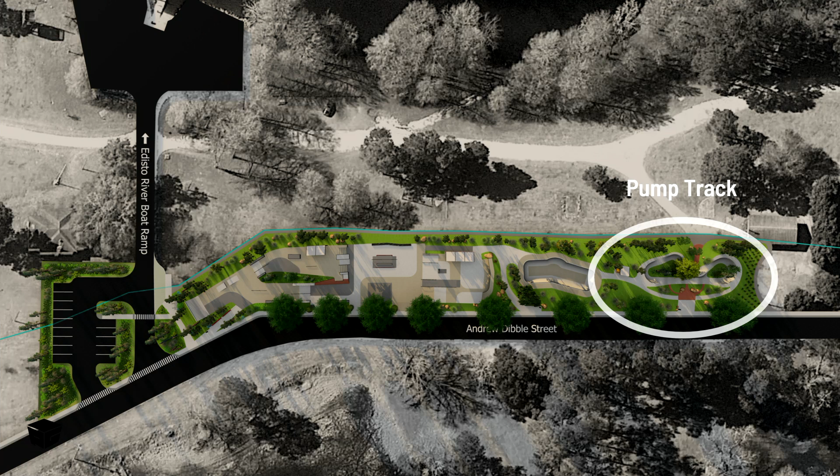One of the things we took aside for inspiration was obviously the Edisto gardens just on the other side of the road, and all the beautiful landscaping that you guys have. So we took that inspiration into the park.

We feel a lot of parks and municipalities stop at the boundary of the skatable areas. So if you call it a court, you're done right there, and then there's nothing. We feel like that's an injustice. We all have friends, we all want to hang out, we want to take a break outside the park and not step on dirt, right? So we went outside of those lines and really created good line of sight and circulation.

We're probably going to tone down some of the landscaping you're going to see, to not compete with the memorial pine trees on one side and also some of the already existing vegetation that's there. And also just to have money to build a skate park, right? So just wanted to let you know you're going to see a lot of art and stuff, but going forward, I want to encourage you guys, any creative ideas, hold onto them, and on the Q&A let us know.

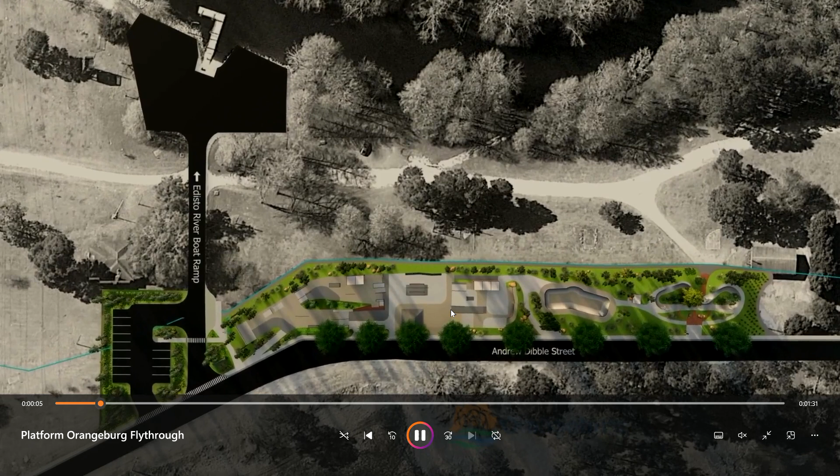So we put this together just to give you a sense of it - it's always hard to discern from a 2D drawing, so the video gives you a nice fly through.

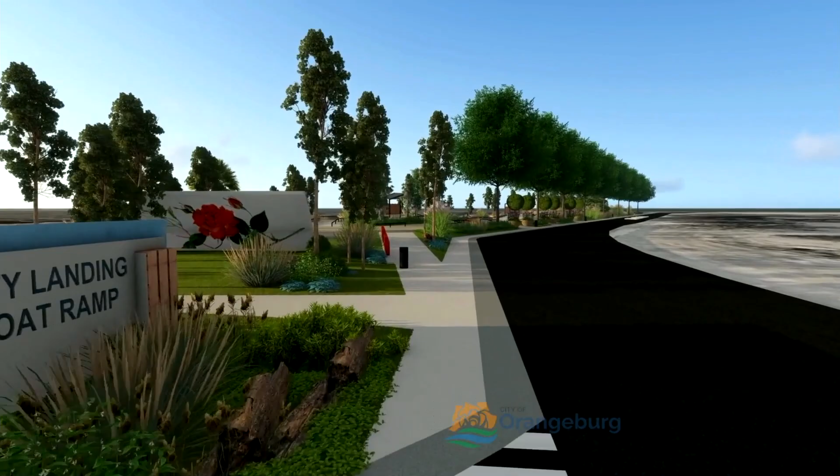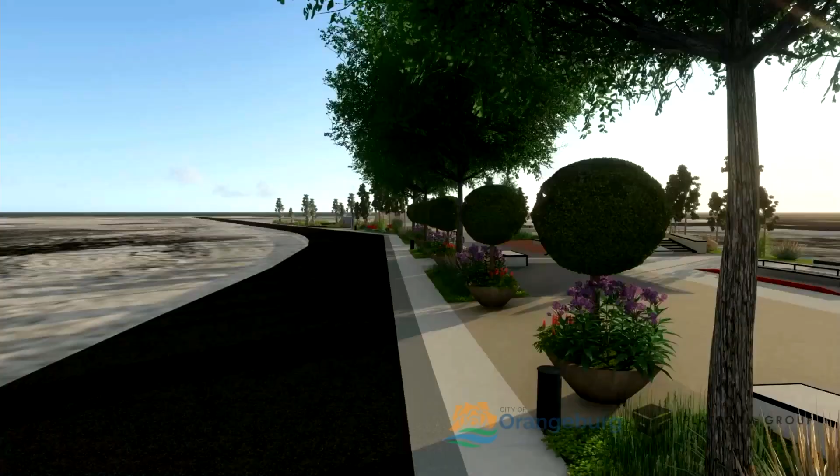Again, to talk to the point made - this is in the city of Orangeburg, so we want to provide things that speak back to that. So not just the skate park signage, but the mural on the back of the bank towards the south end of the park. If you have any other thoughts, those could be good suggestions for the survey - like a sculpture here, things that help you think back to the city of Orangeburg.

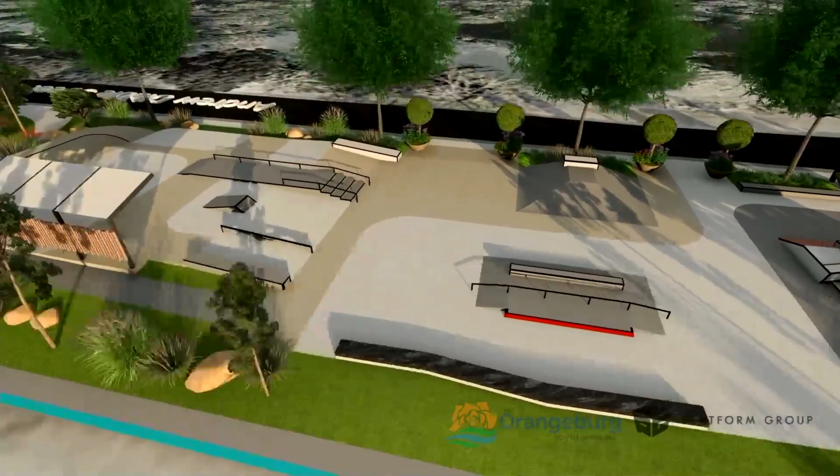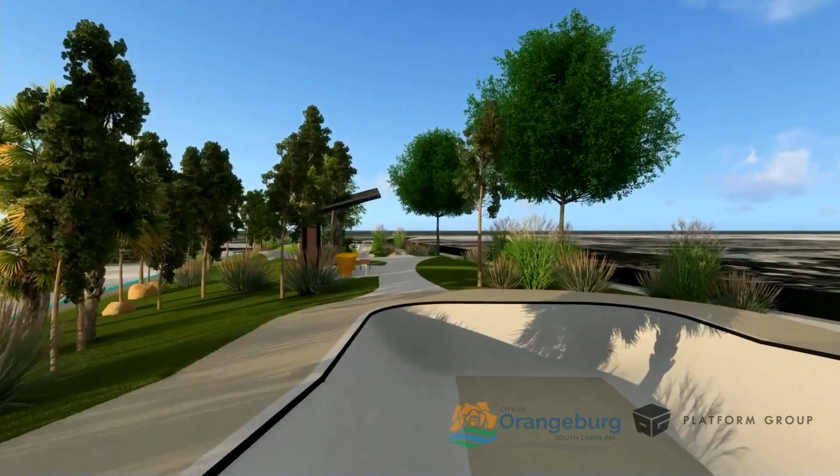A lot of the landscape shown is just to help give a sense of space, but we definitely don't want to compete with some of the existing vegetation out there, especially the trees he was talking about. On the east side of the roadway, they're freedom trees - there's a sign there that talks about it, and they were installed in 1974, 49 years ago.

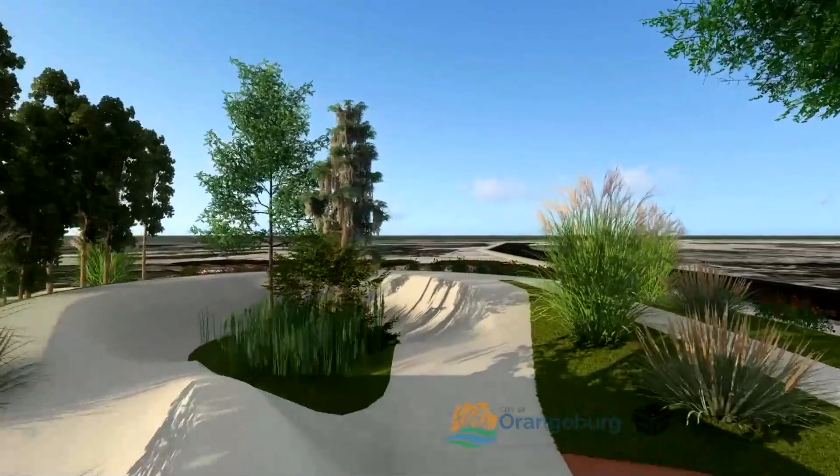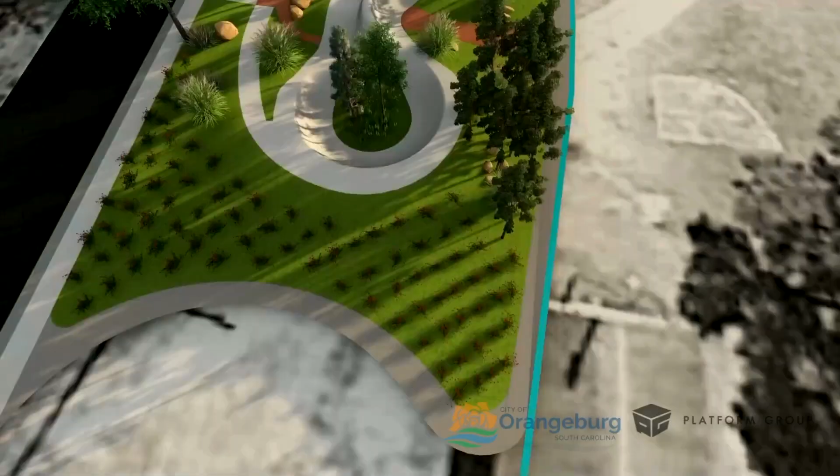Here's the pump track on one side, and you can see the linear aspects of it. We're probably going to talk about toning the elevations on the pump track down a little bit, but this park is just screaming special and unique. So we really want to hear your opinion and hope you like it, so we can build upon this design into the construction.

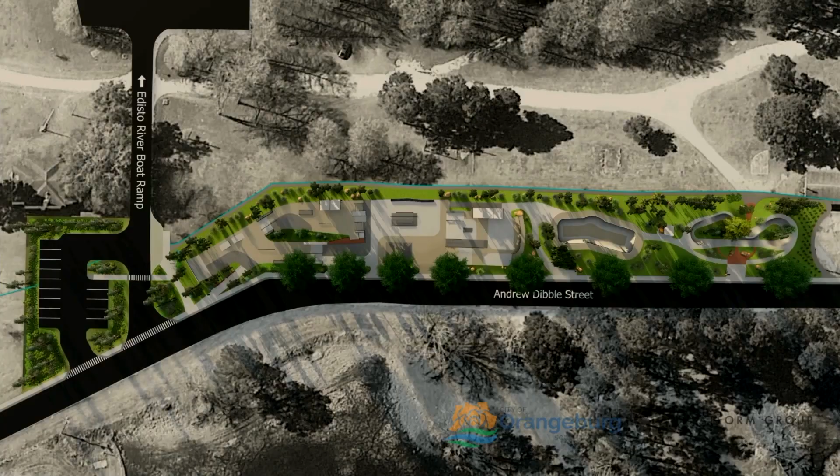That should be the end.

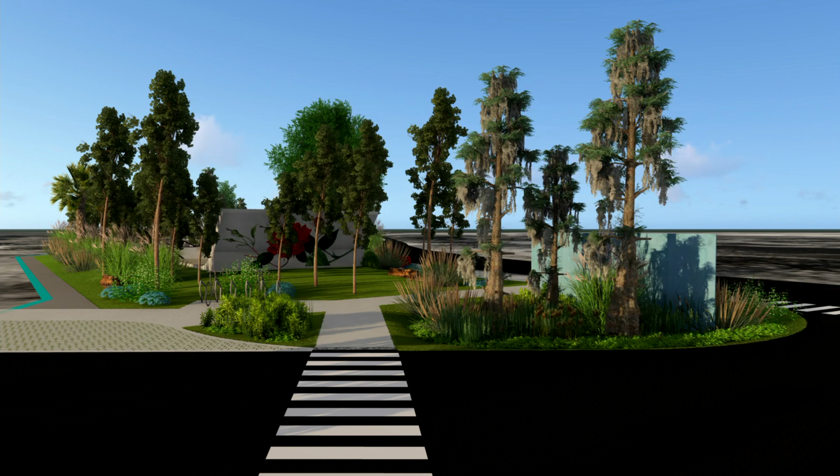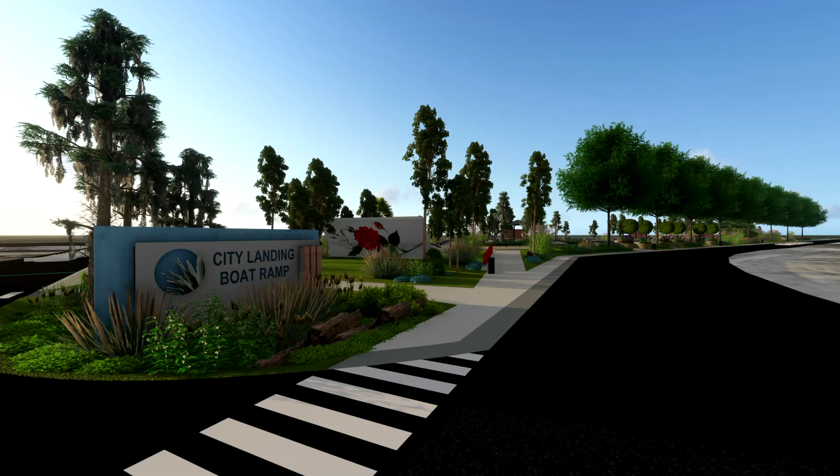So the next set of images we're going to see starts to dive into more detail of the park and design. We can run through these pretty quickly, but these will give you a sense - zooming into the mural on the back of the bank there, the signage for the park, some of the walkways that connect along Andrew Dibble Street, and here's just a number of views that we'll run through.

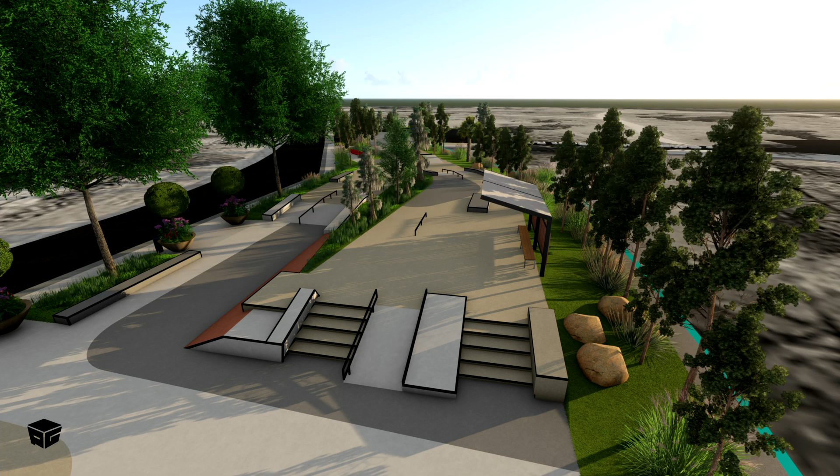Also, since we have some fellow skateboarders and other action sports enthusiasts here, feel free to take notes or just raise your hand if you have any requests.

One thing I want to talk about is that originally, on the first meeting, you guys wanted to replicate a hubba that was in town - it's at the college, right? And it's pretty narrow. In skate parks, we want to go a little wider for user friendliness. So it's really hard to literally replicate it, because we want to replicate something that's actually going to get used.

So instead, we're just going to have 2 standard hubbas. We did put 2 different ones, so I'd like towards the end to get your opinion on what size hubba you prefer, something like on the left or the right, because we're going to mirror both for symmetry. Skateboarding has some people right foot forward, some left foot forward, so we want to offer some symmetry here and there, especially on a feature like that, which will be important for events.

Another thing to point out, going back to the landscape, we're definitely going to be cognizant of shade, because that's a huge thing we hear about all the time, especially in South Florida. So we have a few shade structures that we're trying to locate in the park to give immediate shade, but we'll also be thinking about where to place trees to provide that as well.

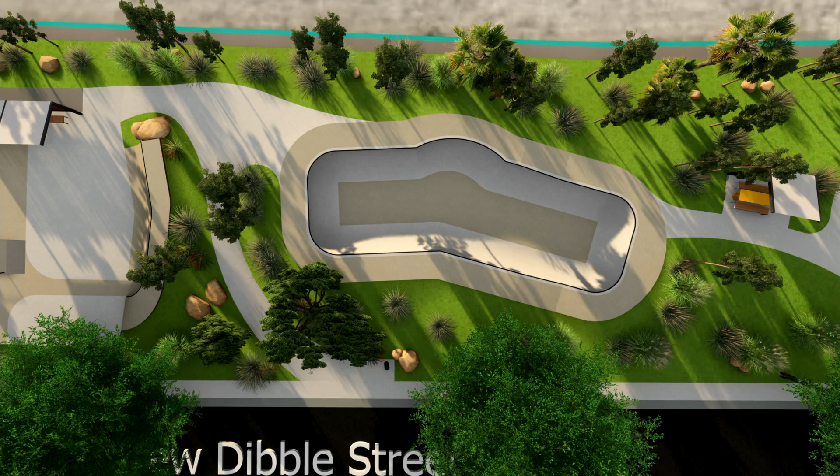The other thing too is the street trees, which help define entries to the park, a little bit of landscape architecture. But here, we're now starting to go into where the mini ramp and the bowl are. Here's a quick plan view of that, again locating another shade structure that's in between the pump track and the mini ramp.

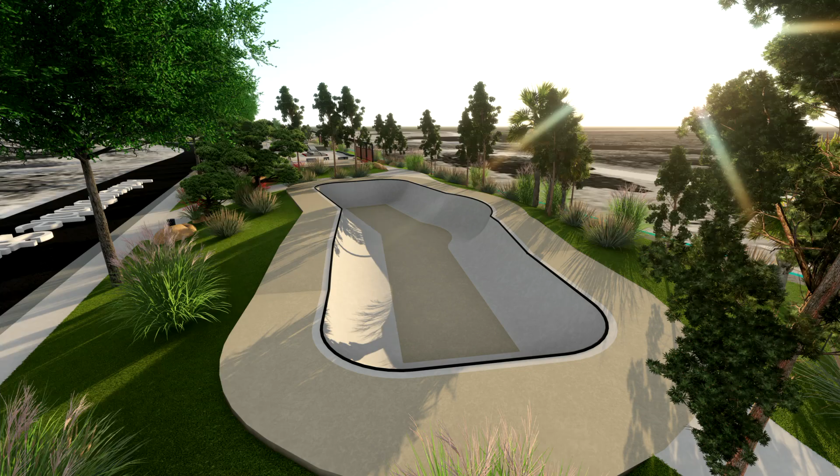So mini ramp, we're talking - a lot of bowls out there that builders make tend to be super deep and all that. We're trying to make a simple 4.5 foot mini ramp, steel coping, user friendly, not too tight. We'd rather you learn how to do a 5-0 to fakie for 20 feet than to sit there and just scratch or grind.

So we feel like that's a missing thing right now. Every time people do bowls, they just kind of go wild, and then they do the opposite - less and less people skate it. We want this to be a fun crossover feature, and we also want line of sight - to be able to see in, make it safe.

And then the last feature, the pump track. On the plan view here, I want to note - another tie-in we talked about earlier - the Edisto Memorial Gardens are just to the north, on the other side of 301. Your Rose Garden Festival was kind of a big thing we took inspiration from, and we wanted to bring that to the south side of the park to make a stronger mental connection between those two spaces.

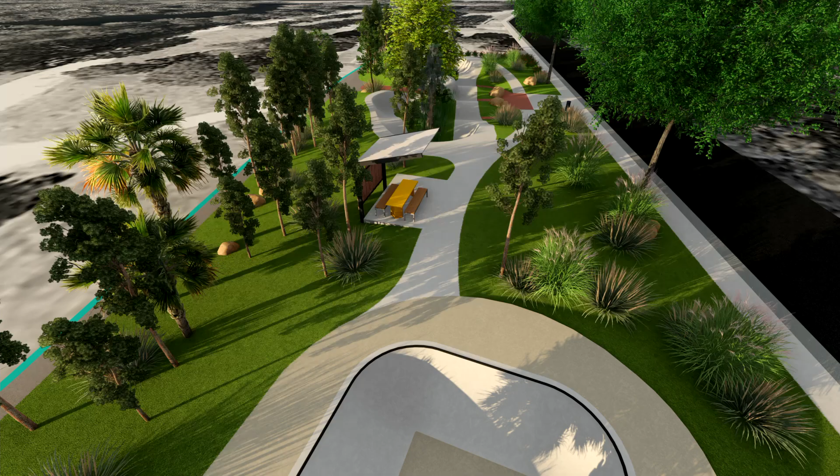So just on the other side of the pump track, we're providing a space for a rose garden to flourish, repeating material with the brick, probably a decomposed granite pathway on the other side, with enough buffer so you don't fall into the rose gardens - trust me, we don't want that. There's going to be like 15 feet of nothing, probably just sod. But again, it's trying to create a space for everybody to enjoy, so it's not centered on just one demographic or one community. It's for the city of Orangeburg, so we want to accommodate everything.

Do you want to talk about pump track? Actually, can you go back to one picture? These little pockets of places to chill are also really important, whether it's for a parent or just resting. So as you can see, some of the connections between the features have plenty of green space, potential for future shade, just to really make it a nice environment.

Another thing I want to point out, great work from Byron, is we're also trying to minimize that big flat impervious slab. We're trying to make sure it's a good, healthy, garden-like experience, so it feels comfortable, not just like a burning pad of concrete, which no one likes. So we wanted both. Good job. Yeah, for sure.

A few images of the pump track.

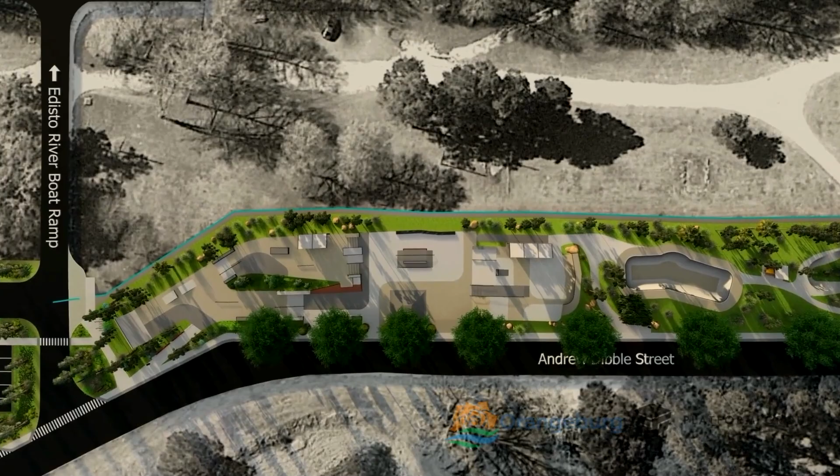Currently, right now we don't, but because of this input with bathrooms and water fountains and things like that, those are things to be considered. It might not happen in the first phase, but it could happen later. Those critical things are what we want to hear from you guys.

I'm used to skating a mini ramp in the woods that someone built back in the day, where you have to struggle to go to the restroom or drink any water. So we don't want that. We want a full facility here with all these amenities.

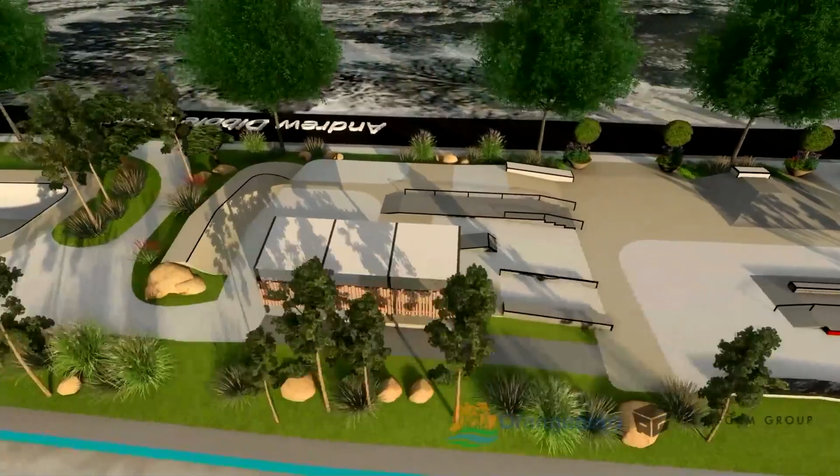Those are things that will be considered. From this point, we go into finalizing a lot of engineering and technical construction documentation, lighting, et cetera. All those things we want to take into account, and whatever we can do in this first phase, we'll deliver, and we'll take notes to hopefully complete all the amenities necessary to provide a beautiful park for the city, including those things.

I did mention lighting because that's something we want to consider here. We know what happens when it's dark at 5 o'clock and you're getting off work ready to skate. You kind of need that lighting, right? That's a good time to skate sometimes too.

Thank you so much, killer questions. Anybody else? You good? Anyone in the municipality? Anyone? And thank you for the bathroom comment, that was awesome. I brought up the light comment because I just wanted to inject it in there too. We are planning on it. Anyone else? Anyone else? Yay. Can't just be the skaters talking. It's typically the other way.

Hi, my question is related to maintenance. So when it's built, how does the maintenance work in terms of inspections and cracks in concrete, that kind of thing?

Absolutely, very good question. So at Platform, we have basically your basic warranty that we provide, as well as a maintenance procedure that Public Works and other departments will have access to in order to know what to look for and how to report any issues and things like that.

On top of that, we'll advise on certain maintenance procedures that actually differ depending on the location of your park. For example, parks I have in Florida near the ocean have much more stringent maintenance requirements, unlike further inland, like here in Orangeburg, which is good for you guys.

But the maintenance on a skate park is almost nothing. The Tony Hawk Foundation likes to say it's 1% to 2% of the cost per year, but it's a lot less than that. Most of that cost really comes from landscaping and changing the trash. You're going to have a popular park, and a popular park requires things that are basic, which is a good thing. That means people are using your municipal facilities. That's our whole point of parks and rec, right? So that's where those costs go.

Some maintenance things I'd call more like improvements and additions do come later down the road, but it's basically the complete opposite of a baseball field, where you pay a certain amount and then through 15 years you're paying a lot more because you got to mow a lot of lawn and water a lot of stuff. Skate parks are pay up front, set it and forget it. The trash and landscaping are going to be your biggest expense. That's one of the killer things about skate parks, you could leave it alone.

And then there's other community organizations. We recently did a skate park under my previous company in Pensacola, underneath the interstate, awesome park. There's a national organization called Skatepark Respect that gets older people to bring volunteers to come in and keep the park clean, just kind of show examples and things like that. There's all kinds of organizations like that that will want to partake.

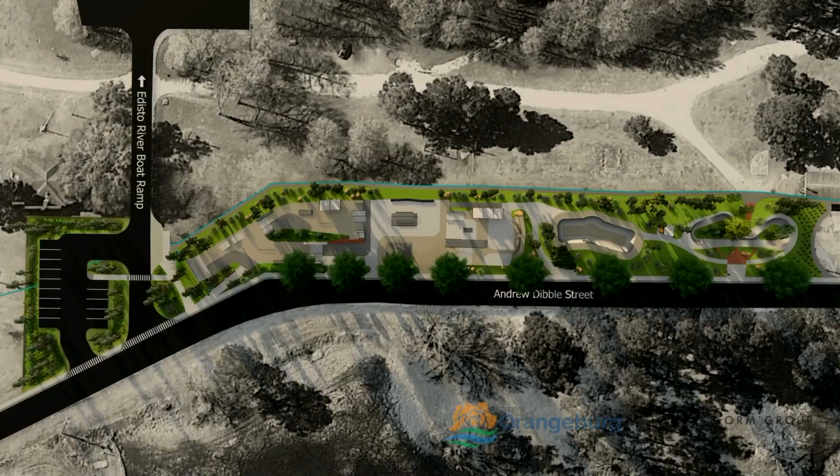So we've got to dig all that out and then we're going to do a little engineering marvel in there. But I've done that before, I feel comfortable about that process. Those are challenges we can take on so we can provide you an awesome facility.

So as soon as we get through those hurdles, we're hoping — what are we saying, 3 months? We're trying to build as soon as possible. Right now I can't give you an exact date, but it's speeding up now more than before. All those unknowns are known now, thank goodness.

Thank you so much, I love that. Slow progress is good progress. I wanted it faster too. Keep them coming, guys, I love this. You're from the news publication, you have any questions?

I guess I'd like to ask if you could elaborate a little bit more on the drawing of people from Charleston and Columbia. I wanted to ask what the nearest similar kind of park to this scale is that you can think of in the area.

Sadly, there's a park in Columbia, right? So is it pretty transition heavy or half and half? Charleston, sadly, is a pay-to-play park. Charleston County — I was the designer for that as well, by the way. But the skate community there fought for a free park, the county just didn't run it that way. It's just something about that county, it's just the way they do it, and they said it from the beginning, but the advocates tried. So it's not too popular.

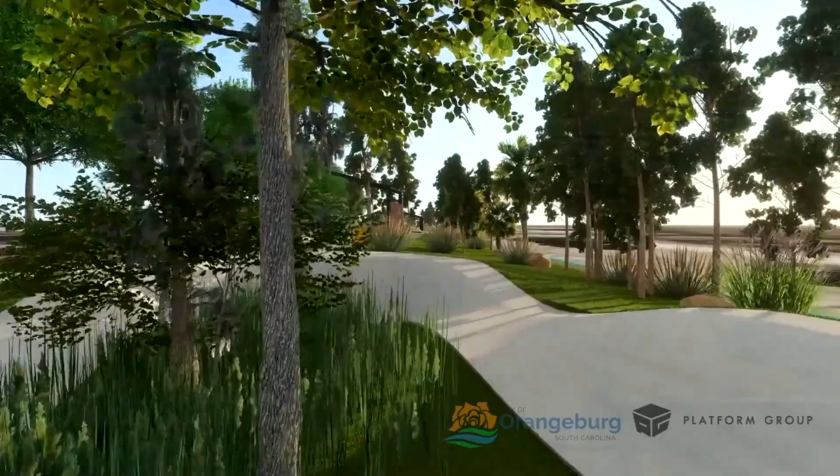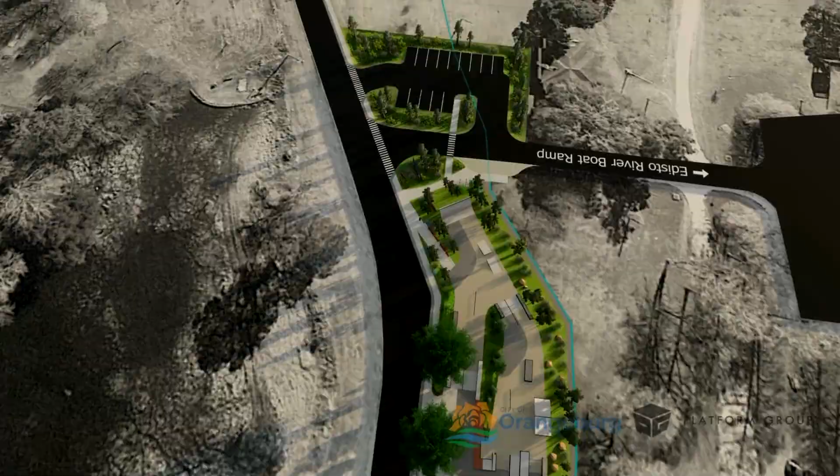We absolutely design parks with everyone in mind, but the fact is the biggest demographic of action sports is skateboarding. That's why events are sponsored by big companies like Nike, Adidas, New Balance, Vans. You know, all that stuff goes because it's the biggest demographic, over skiing, snowboarding, and even mountain biking.

That's why it's so attractive for marketers and events, and it's one of those things where if you build it, they will come. So when we talk about skate park designs, it deals with the ROI and the main user group, but it's definitely influenced. We have a lot of bike partners we talk to, and they influence a lot of stuff.

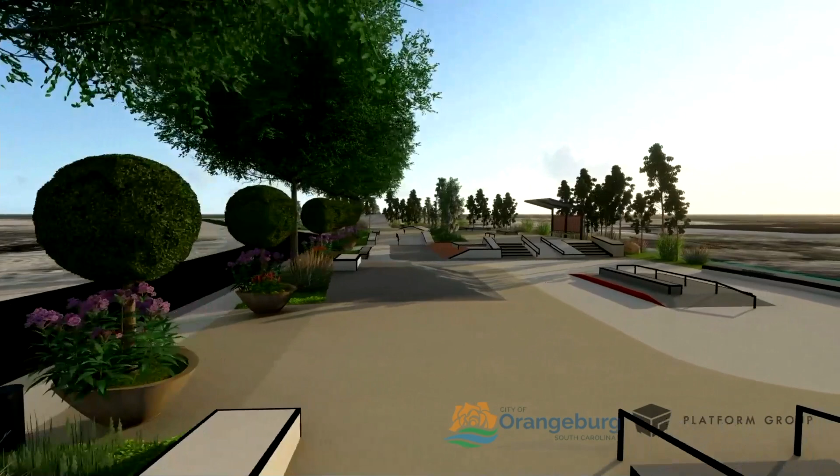Just to get technical, there was a contest in Huntington where they made a mock stair set, I forgot from where, but they made them at 4 inches, so it looked like a big stair set but it was kind of like for show. Then a biker friend of ours, Trey Jones—pro, hey Trey—super awesome biker, said, man, I love that because we can actually ride up those stairs. I'm like, boom, thank you. We can work that out because they're not ADA steps, they're skate steps.

So we can work that way, and those are little examples of how we get influenced by other disciplines and take that into account. Same goes for when we're talking with a blind gentleman who skates, telling us how he needs that space so he can focus with his stick to engage the feature. He wants a ledge, not 8 feet, because he runs out of it too fast. He wants a 24-foot long ledge. Skaters also want a 24-foot long ledge. So it's like they actually have vision, and it's awesome for everyone.

So all those things influence forward-thinking progression. You got any more? Because these are good questions. Anybody else? Kids, keep them coming, guys.

Well, I think we're doing pretty good. You came in late, can we play the video for him? Oh, we're playing it, what's up? You got any questions? I know you came in late, you can ask anything you want. I'm Tito, by the way. What's up, Jeremiah? Well, you just missed that question. Ask them, we're hoping to.

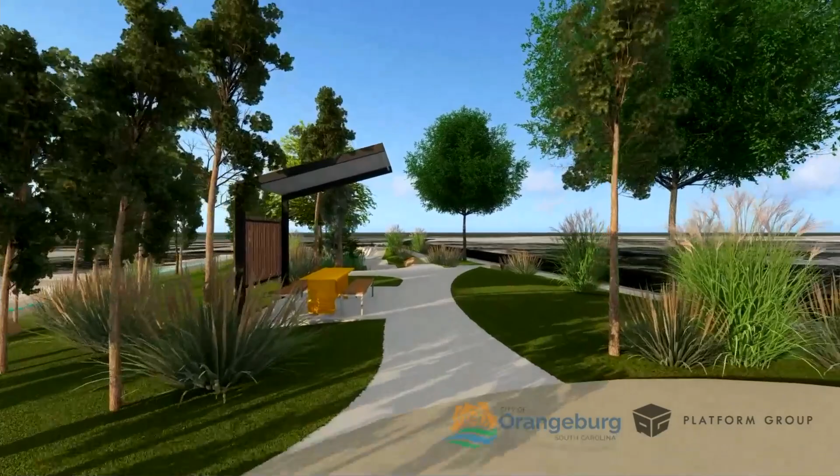If the city has any other ideas, I'm sure they can also share, but that would be the best thing you can do: spread the word. It doesn't matter if they're a state away, or if someone's just planning on visiting Orangeburg, we want to hear it. There's a location spot where you put your zip code, so it tells us who's close, who's nearby. But that's all important. People visiting are just as important for this community park, because that allows you to learn more, see new styles, get inspired by other skaters.

We want those tours to want to come to Orangeburg. We're going to have marketing that's going to scream out Orangeburg. This is not a park that's going to disappear on Instagram. There's something that once you see it, you know that's the Orangeburg skate park. All those things are going to be out there. The survey, any ideas you have—I get ideas three hours after I leave a place—the survey is going to allow you to throw any wild idea in there. Whether it's art, anything creative, anything abstract, don't hold back. Thank you.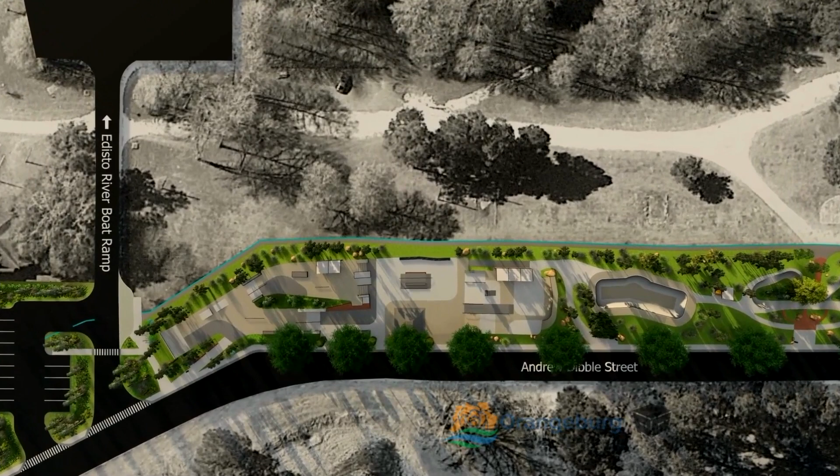But honestly, we are doing this for you and for the entire community. We want this skate park to be a place that people from age 2 to 82 can come out and enjoy. Like Tito alluded to, this is not just for skaters, this is for folks who want to participate in various ways. We are hoping and expecting it to be an attraction for Orangeburg. We want to attract folks from all over the country, and as our Parks and Rec director, Sean Taylor, loves to say—it starts in parks, right, Sean?

It starts in parks. We want this project to be catalytic in helping promote Orangeburg, helping it grow and prosper. This is a hugely important project that we're undertaking. What I love so much about Platform Group, Byron and Tito, is that they take the time to listen. They not only listen, but they try to take your suggestions and incorporate them into the design. For me, that goes a long way in hopefully making us all feel like it's our park and we had a part in its development. So these guys have been great to work with—you see the enthusiasm, the passion they have for what they do.

I really appreciate what they bring to the table. Appreciate Herb and all his work, and we found some things there at Andrew Dibble that, as Byron and Tito alluded to, we have to work around and work through, but his expertise is helping us do that. John Sang has been an integral part of this, being at every meeting and helping us push this through. So this has been a total team effort, and we know Parks and Rec are going to be a big part of this as it comes on board. We talked about maintenance and making sure the park is well maintained for generations to come.